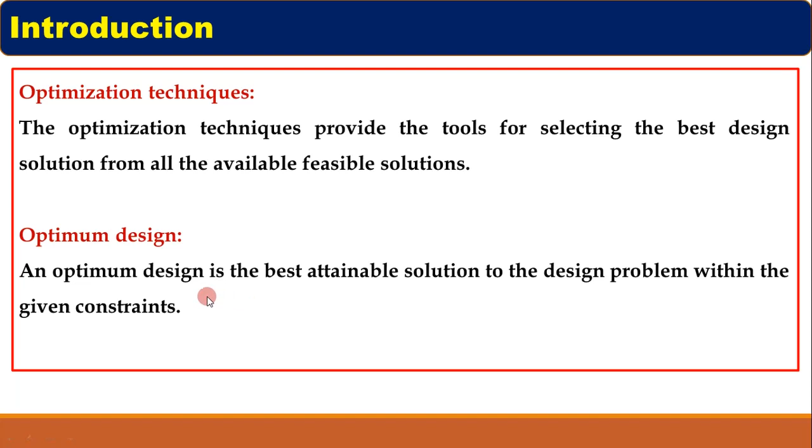So that means an optimum design is the best solution to the design problem within the given constraints. So the best solution selected from all the available solutions is called optimum design. Then we'll see how optimum design is different from normal design. The normal design problem looks like this.

A cantilever beam of circular cross section and length 200 mm is subjected to a force of 5 kN at the end. The factor of safety based on the tensile yield strength is 1.5. Design the beam if the material of the beam is steel with yield strength SYT equal to 400 N/mm². So basically this is a normal design problem in which we have to design the cantilever beam which is subjected to a force of 5 kN at the free end.

Factor of safety is given and SYT is given. So this is a straightforward problem where we have to find out the cross section of this cantilever beam. By using the bending stress equation, we can find out the diameter of the cross section of this cantilever beam using this SYT and this Fs. So here we have only one option for the material. So this is a straightforward problem.

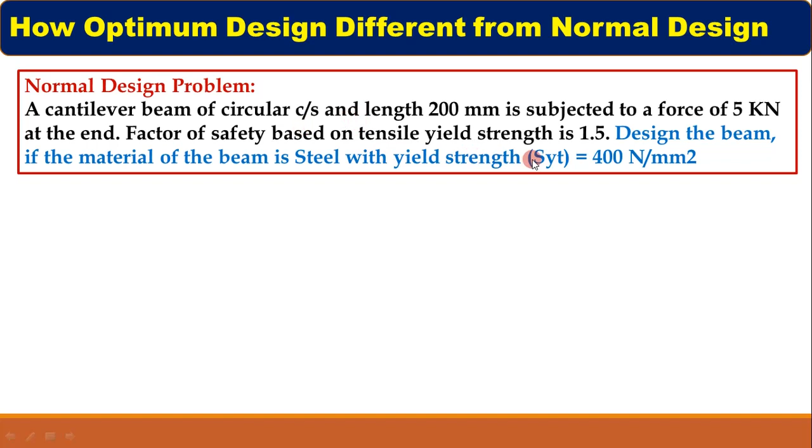We don't have multiple solutions. We have only one solution with a single value of SYT, and with that single value of SYT, we have to find out the diameter of the cantilever beam. But look at the optimum design problem, how it is different from normal design.

Now in this optimum design problem, we have to design a cantilever beam of circular cross section, length 200 mm, subjected to a force of 5 kN at the end. Factor of safety based on the tensile yield strength is 1.5. Design the beam with the objective of minimizing the material cost out of the following materials. So this table is given.

Column-wise we have material, mass density, material cost per kg, and yield strength. We have three different materials: steel, aluminum alloy and magnesium alloy. For all three materials we have the mass density, material cost per kg and yield strength. So if you compare these two problems, in the normal design problem we have only one material and hence a single value of SYT. But in the optimum design problem we have three materials.

As here there is one material, we have only one possible solution. As here three materials are given, three possible solutions are available. And the normal design problem is without objective. There is no particular objective while designing the machine element. But if you observe, this design problem has the objective of minimizing the material cost.

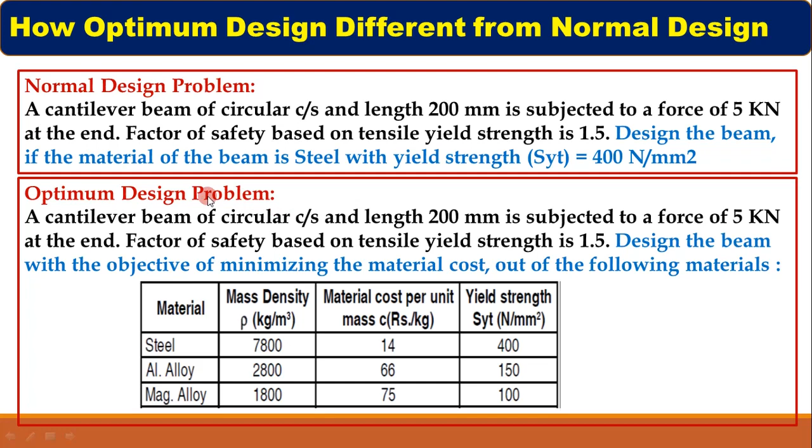So in the optimum design problem we have three possible solutions, and by using the optimum design technique we have to select the one best possible solution which will have the minimum material cost, and that solution we call the optimum design for this design problem. So this is the way the normal design problem and optimum design problem differ. And to solve this optimum design problem, we are going to study one method called Johnson's method of optimum design in the next part of the video lecture.

Now let us switch to the next part. So now we'll study the classification of design parameters. In optimum design, this word, design parameters, is used many times, and there are different types of design parameters. So let us look at the classification of design parameters.

So first one is the functional requirement parameters, and these functional requirement parameters also include the undesirable effects. Next we have material parameters, and third we have geometrical parameters. So in the next part we'll see one by one what is meant by these functional requirement parameters, why it is said including the undesirable effects, what is material parameters, and what is geometrical parameters.

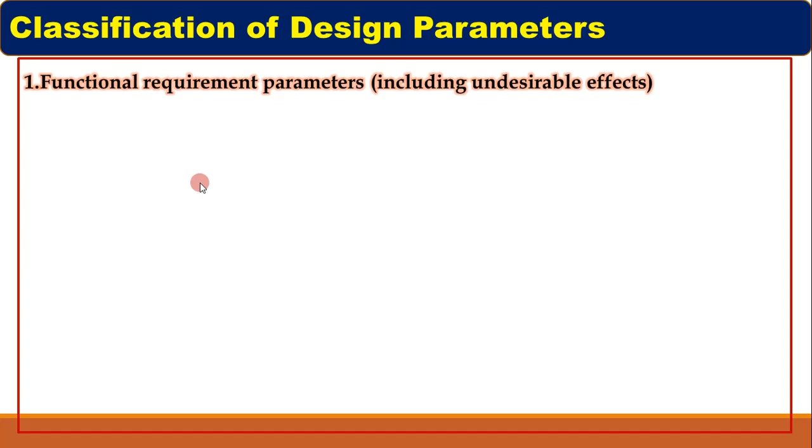So first one is the functional requirement parameters including undesirable effect. The functional requirements are the conditions which must be satisfied by mechanical elements. So these are the conditions. Functional requirement parameters are nothing but the conditions which must be satisfied by a mechanical element that we are designing.

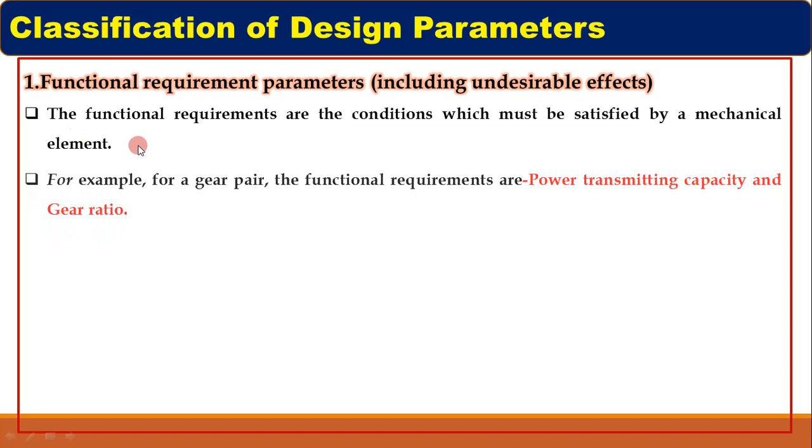For example, if you are designing a gear pair as a mechanical element, then the functional requirement parameters would be power transmitting capacity and gear ratio. So while designing the gear pair, these parameters must be satisfied, because the function of a gear is to transmit the power with a certain gear ratio. That's why these two parameters are considered functional requirement parameters for a gear pair, and if we are designing a gear pair, these parameters must be satisfied.

Similarly, for a helical compression spring, the functional requirement parameters might be the maximum force exerted by the spring and the spring stiffness. So while designing the spring, these parameters must be satisfied if it is mentioned in the design problem.

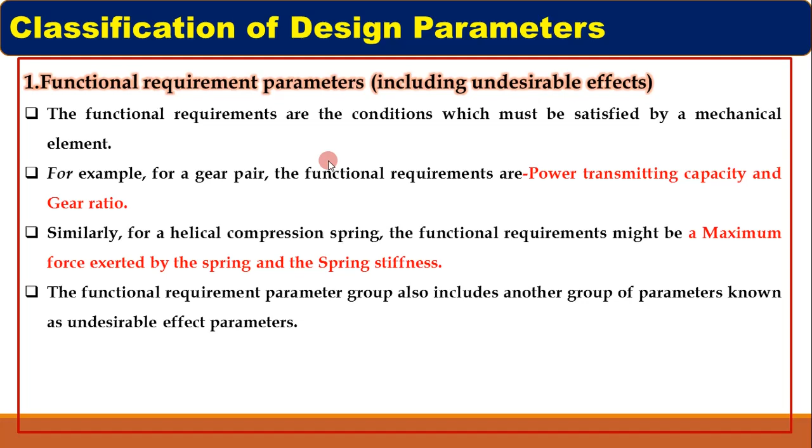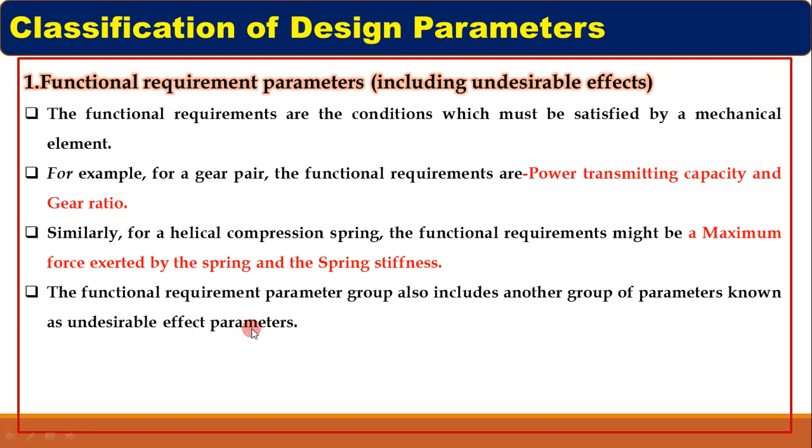The functional requirement parameter group also includes another group of parameters known as undesirable effect parameters. All the mechanical elements have certain undesirable effects like cost, weight, stresses, deflection, and vibrations.

If you look at these parameters, you will find that the power transmitting capacity and gear ratio, maximum force exerted by spring, and the spring stiffness are the parameters which we may require to maximize. But cost, weight, stresses, deflection, all these parameters we need to minimize. Cost we need to minimize, weight we need to minimize, stresses we need to minimize.

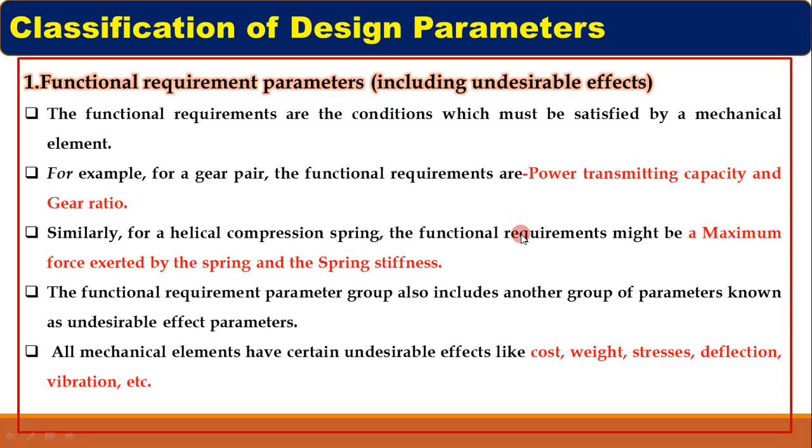That means undesirable parameters many times we need to minimize, and all these functional requirement parameters mentioned in these two examples need to be maximized. So functional requirement parameters many times are maximized, and undesirable parameters we need to minimize.

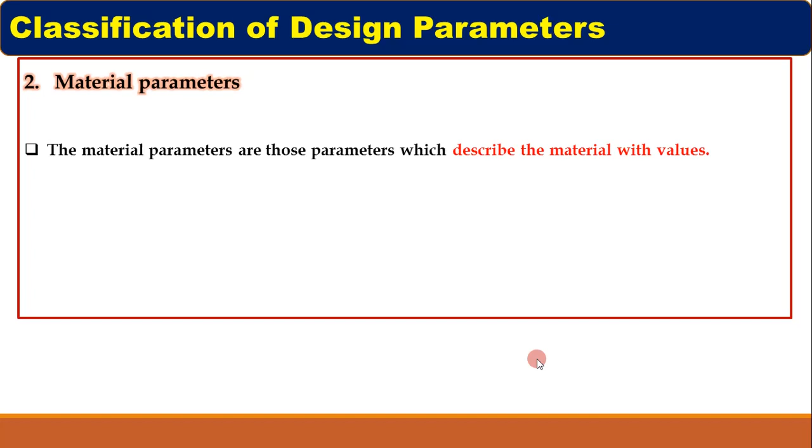So material parameters, this is the second design parameter. The material parameters are those parameters which describe the material with values. For example, density, modulus of elasticity, modulus of rigidity, Poisson's ratio, yield strength, ultimate tensile strength, cost per unit weight are nothing but material parameters. All these parameters will be mentioned with some particular values. So these are the parameters related to material, which describe the material with values.

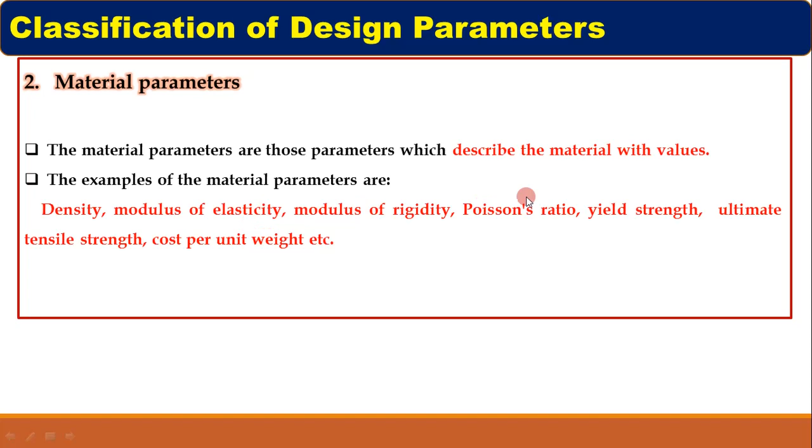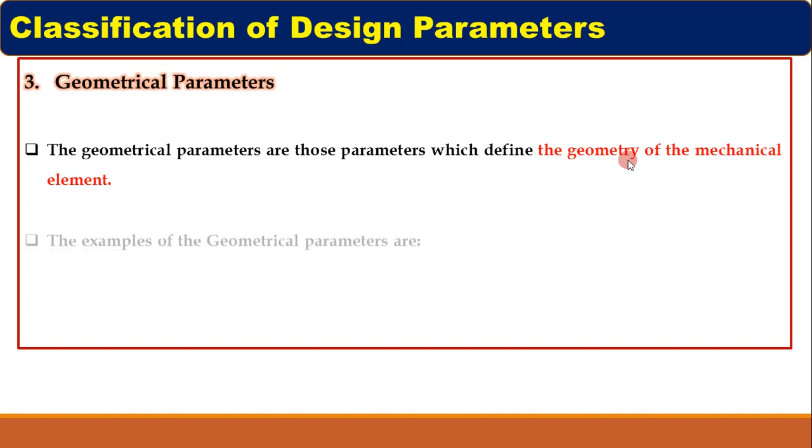Third one is the geometrical parameters. The geometrical parameters are those parameters which define the geometry of the mechanical elements. Examples of geometrical parameters for spur gears are module, number of teeth, face width, pressure angle, addendum, and dedendum. If you consider the example of a shaft, then there would be diameter and length.

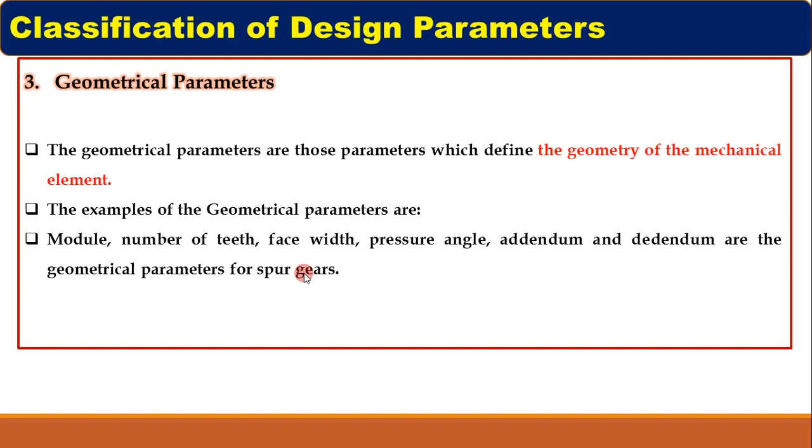If you consider a spring, the geometrical parameters would be its outer diameter, inner diameter, wire diameter, and pitch. These are some examples of geometrical parameters. So depending on the components, these geometrical parameters will change.